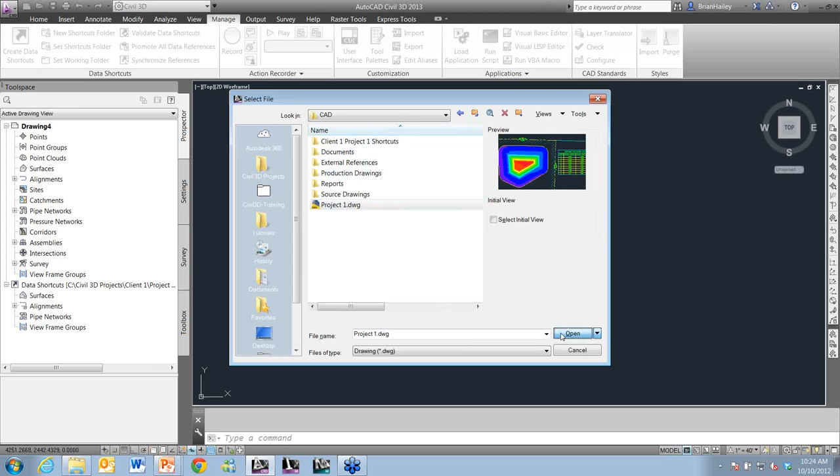Now that I've created this, let me go ahead and actually share some data. So let me open up a drawing here. I'm going to go open up a drawing for Project 1. So Client 1, Project 1, Civil, CAD, and there's my drawing here for Project number 1. So this is my Project 1 source file. This has all the data in it. So I need to open up the drawing that has the data in it.

Right, so here I've got a lot of fun stuff in here, and I want to share some of this stuff with the rest of the project. This surface, for example - if I select this surface, you can see the name of this surface is Final. And I want to share this because I'm going to do some plan and profiles in another drawing, some pond calculations in another drawing, whatever the case is. And so I'm in this drawing here.

Right-click on Data Shortcuts and choose Create Data Shortcuts. This will create the data shortcut. Now, as soon as I do this here, I'm going to be greeted with a nice little nastygram. Basically this is saying, hey, in order to create the data shortcut, you have to save immediately before you run this command. So if I come in here, I need to save the drawing, and I save the drawing, and then just out of habit, after the drawing's saved, I come in here and I accidentally pan.

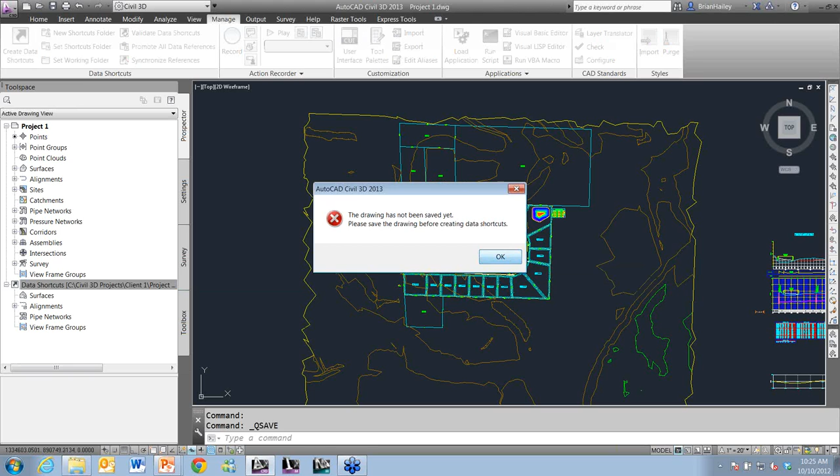Right? Come over here and I say Create Data Shortcuts. I'm going to be greeted with the same message - the save has to be immediately before the command. Now, I have seen issues with this before. Some companies have a LISP routine that runs after a save. If that happens, you're going to have a hard time creating your data shortcuts.

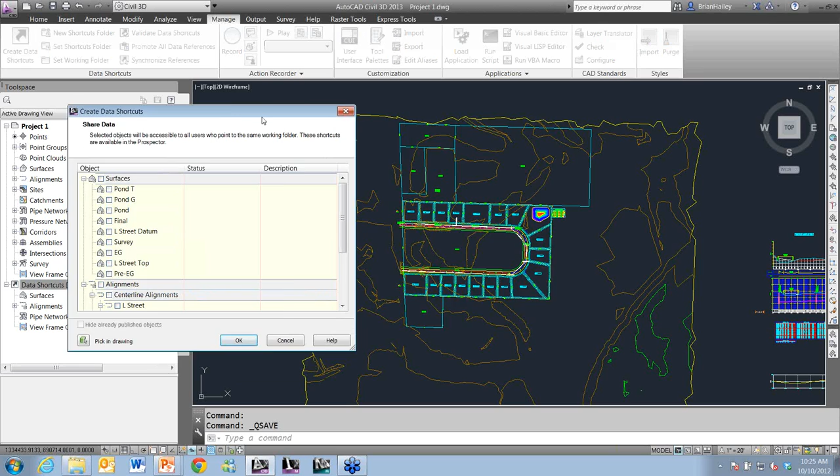So now when I come in here and I create my data shortcuts, I'm greeted with this nice dialog box. This is basically asking me, what data do you want to share? Well, really the only data I want to share right now is my final surface, so I choose my final surface.

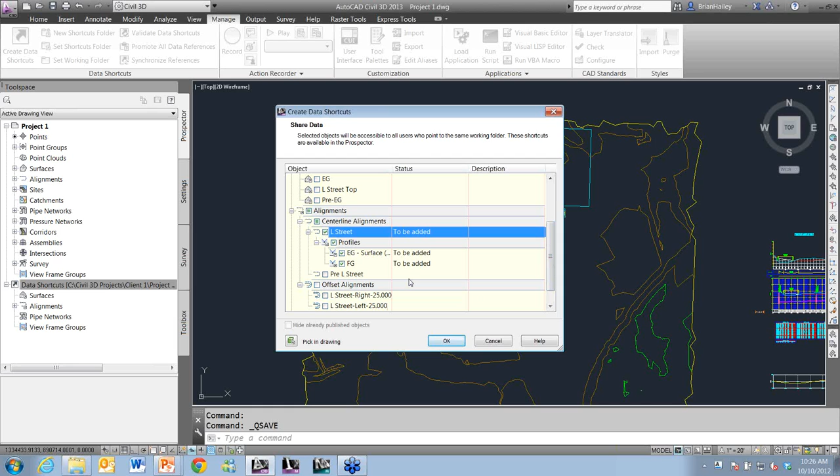And maybe I want to do my L street as well. So this is the data I want to share with the rest of the project. I select OK. And now underneath my data shortcuts, you'll see I can expand these out, and I can see all that data over here under my shortcuts.

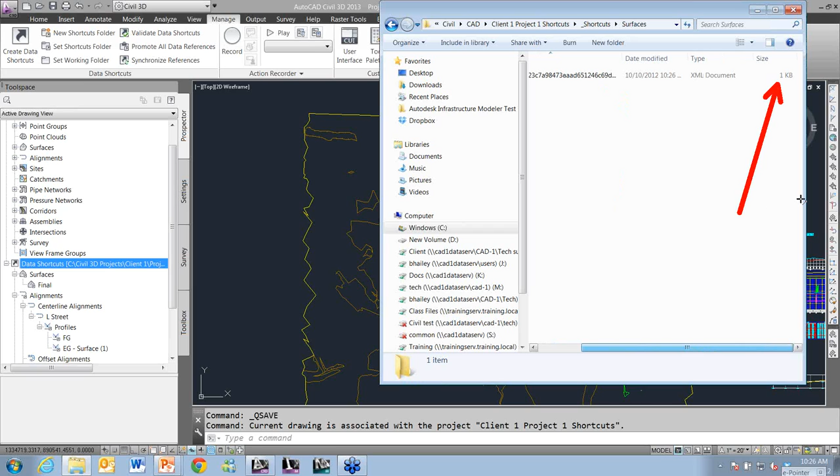Now let's talk a little bit about this shortcut thing. What is this shortcut? Well, let's take a look at it. If you come over here to my shortcuts folder, I go to surfaces, this is the shortcut. It's a little XML file, right? And if I scroll over here, you can see it's an extremely small XML file. This is not the data, this is a shortcut to the data.

All right, if I double-click on this and I open it, oh, it opened up on my other monitor. You can see that's all it is. It's saying, hey, go look here for this surface. It's named this, it has a handle of this. Here's some properties of it.

And that's all it is. It's a shortcut. You can kind of think of a data shortcut like a shortcut on your desktop. Right? Is that Civil 3D? Well, no, it's not. That is a shortcut that runs Civil 3D. This says, go launch this program.

If I right-click on here and I go to the properties of this shortcut, you'll see it says, hey, go run this file. That's basically all it says. If I have Civil 3D up and running, and I come in here and I erase my shortcut off my desktop, what happens to Civil 3D? Well, nothing, it still continues to be there. It's just going to be harder to launch Civil 3D the next time I need to launch it.

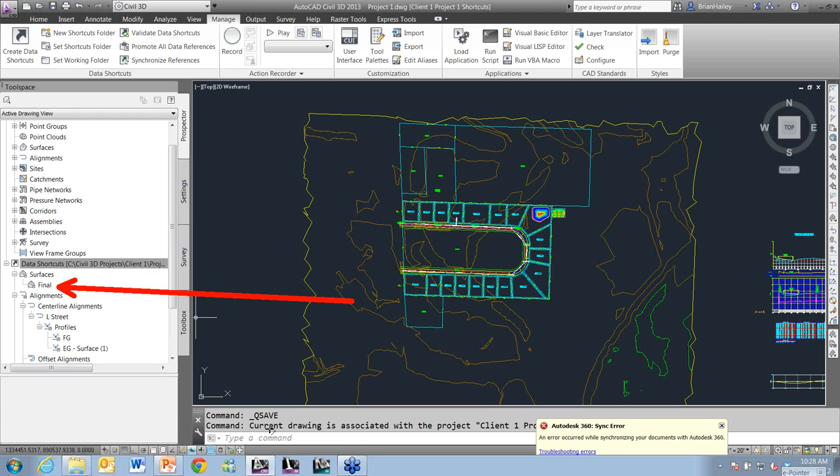You can think about the same type of thing as your shortcut. All right, once I create a data reference using the shortcut, do I need to keep the shortcut? Well, no, it's just going to make it a little bit harder to create that reference later. Now, the analogy does break down a little bit, and I'll talk about that here in just a bit.

But now I've got this shortcut, let me go ahead and create the reference. So I'm done with this drawing, so I'm going to go ahead and close this drawing here. And let me just go ahead and close everything. I'm going to create a brand new blank drawing.

And I want to reference that surface into this drawing. So I come over here to my surfaces. I right-click on the data shortcut, and I get really bummed out because create reference is grayed out. I can't create a reference. Why can't I reference this?

Well, this drawing has never been saved. Right now, this drawing just exists in RAM, it's in memory. In order to create the reference, I actually have to save this drawing. So I'm going to save this drawing. I'm going to call this one surface shortcut or surface reference.

So now that the drawing is saved, it doesn't have to be immediately saved. I can come in here and erase and pan and do all sorts of other things. It just needs to be a saved drawing. So now I can right-click on here and create the reference. Brings up the dialog box.

Basically what it's doing is it's creating a surface in this drawing. This surface exists in this drawing. The only difference between this surface that I'm creating now and any other surface is all of the data for this surface comes from the drawing that contains the original reference. So I select OK here, zoom extents, and here is that surface.

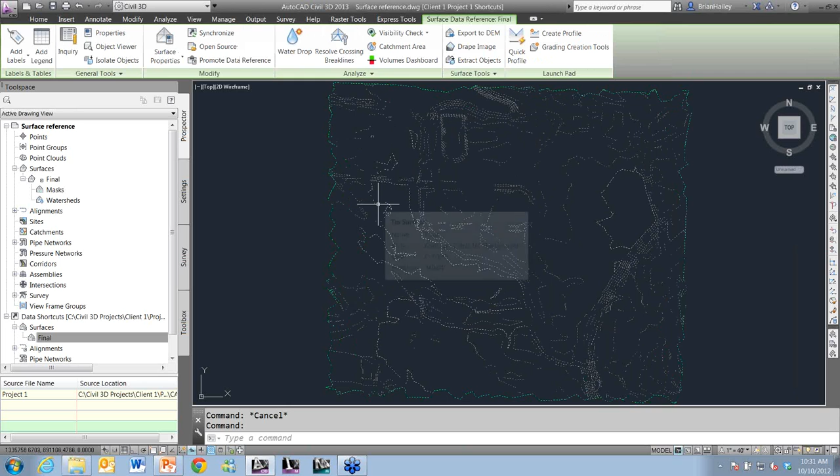So let me leave this drawing open. I need to go make some edits to this surface. I simply grab the surface and need to make the changes in the original drawing. Up there on the ribbon, I can open the source drawing. So I go open the source drawing. Here is the original drawing as soon as it gets done opening.

Now, for whatever reason, it always seems to switch me back to the drawing I was in. So I'm just going to switch back over here. And I want to make some changes. Let's see.

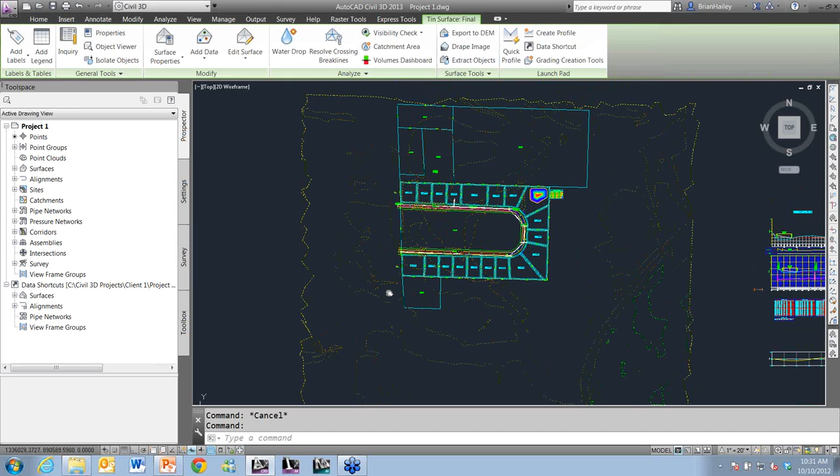What kind of data do we have in here? We've got a couple of pastes. I don't want to have this L Street pasted in here anymore, so I'm going to uncheck that and rebuild this. What you'll notice is in the area of the street, I'll no longer see the contours representing the street. I'll go ahead and close and save this drawing.

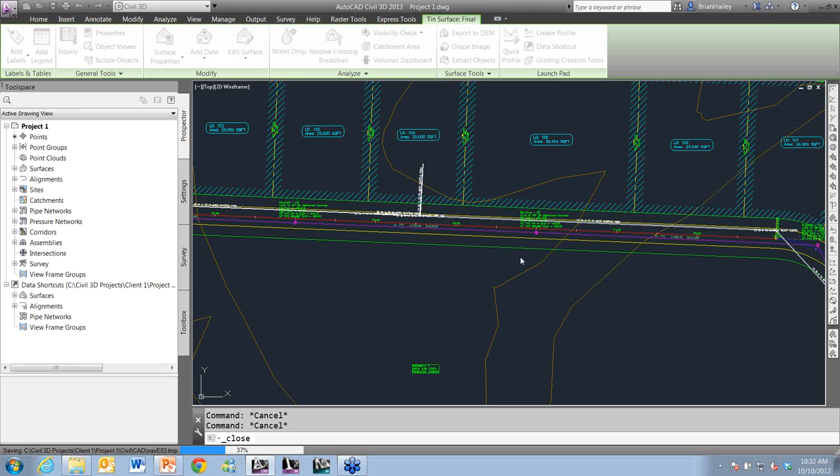So I made a change to the surface, and you'll see the change here a little bit more in a bit. This is what I was referring to - I got rid of the street from the surface.

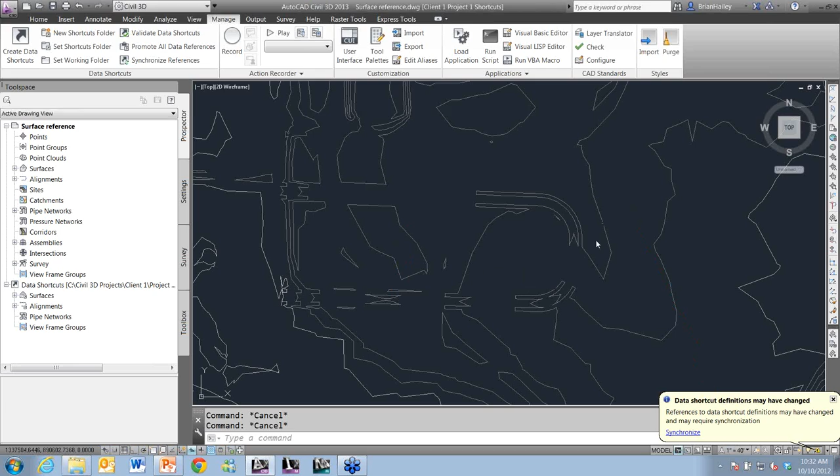Now, as I'm working in this drawing, you'll notice a little bubble pop up saying, hey, your data has changed, let's go ahead and synchronize the data. So I synchronize the data, and you'll see my contours change. This surface is now up to date with the original drawing, and that's all that this little message is saying - it's synchronized. Cool, thanks.

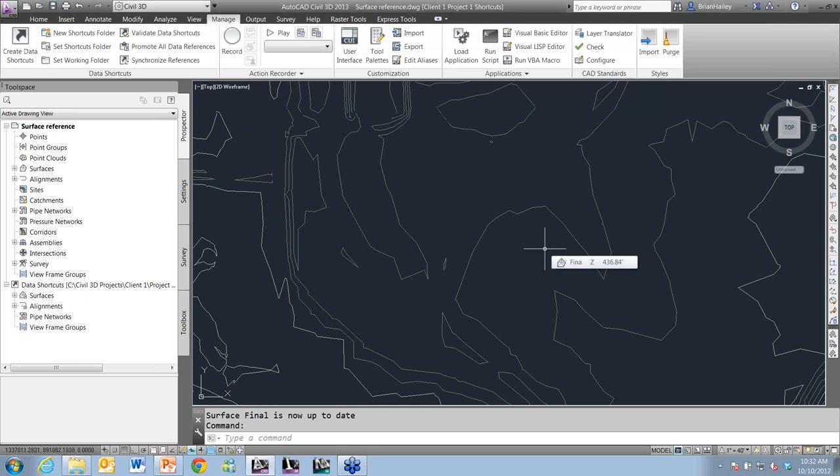And so that's how data references work. Now, remember the analogy I was talking about with the desktop shortcut - if you erase it, you don't need that shortcut after the application's been launched. If I were to come in here and erase this shortcut, I can do that, there's nothing wrong with that. However, if I keep the shortcuts here, Civil 3D will continue to use those. So let me show you the example here.

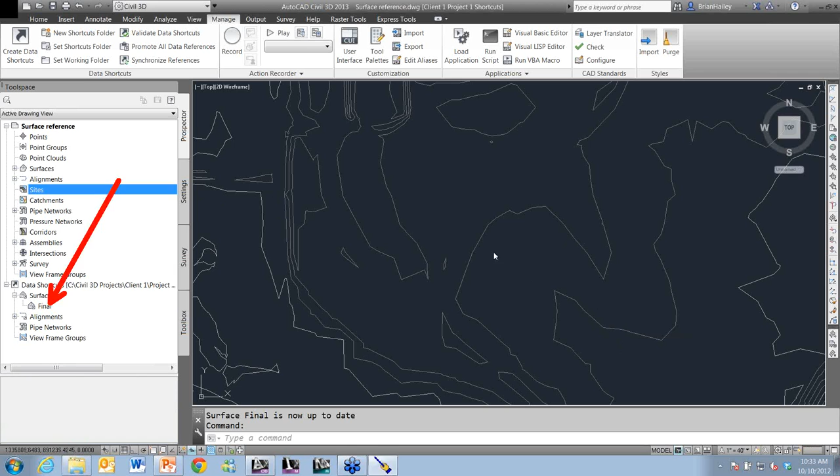I'm going to go ahead and close this drawing. Here I have this wonderful surface. Go ahead and close it, save it. And I'm going to switch back over to my Windows Explorer and rename that drawing.

So here is that Project 1 drawing. For whatever reason, we decided this should probably be in a different location or should be named differently or something along those lines. So I'm going to move this drawing into the source drawing folder.

Now back over here in Civil 3D, if I go open up that drawing that referenced that surface, you'll notice no surface. Why? Well, it couldn't find the source file. And if I expand out surfaces, you'll see I get a little warning symbol next to it saying, hey, I can't find this surface.

And if I expand out, well, the shortcuts look just fine. Now, there is something cool here - if you right-click on here, you can validate the shortcuts. And if you validate the shortcuts, it'll tell you which ones are no longer valid. So you can see these are all invalid shortcuts.

Now I might have 30 or 40 different drawings that reference that surface. If you just have one, it's not that big a deal. You can always right-click on here and repair the broken references, and you can fix it. There's nothing wrong with that, it just seems to be a lot of work if you have a lot of things that you need to fix. And this is something a lot of people don't know about.

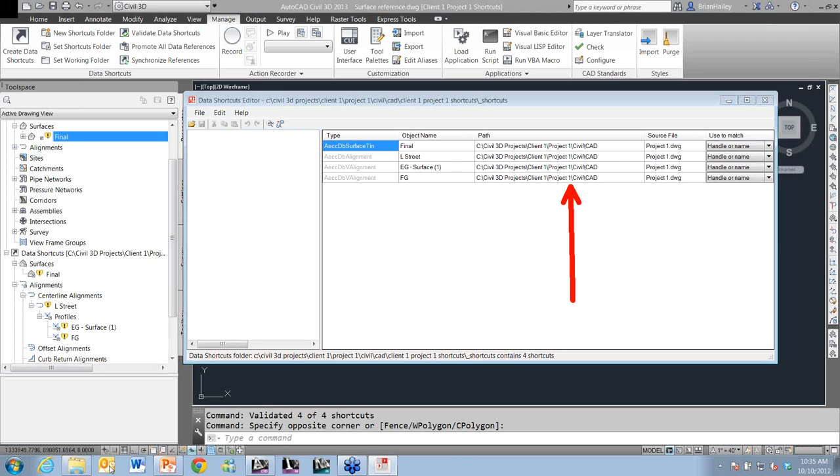Well, I want them to reference the right location, so I'm going to go find that location. So I put it here in the source drawing. I'm just going to copy this path, and I want to replace this path with the newest one. So I'll come out here and I'll edit and do a find and replace - I want to find this path and replace it with this path, I'll paste that in.

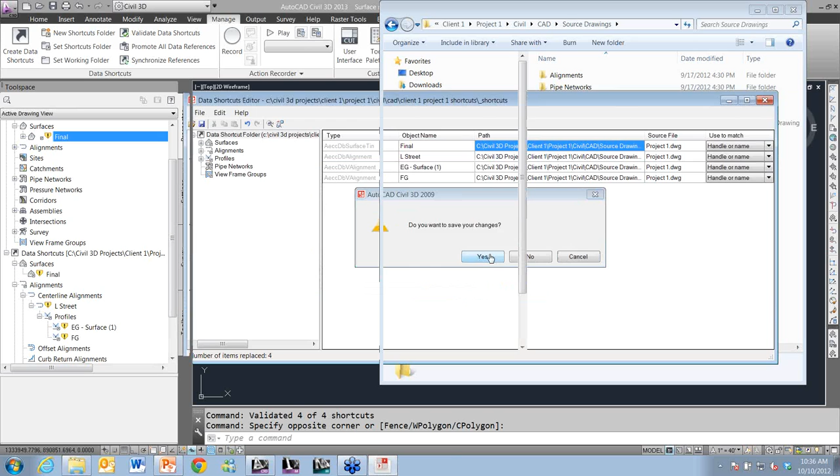I'll replace them all so they have the new path. I'll close this and save it, then close out of this drawing. Now I'll go back and open up that drawing again. I didn't make any changes in Civil 3D, I just did all those changes back there in the shortcut editor.

So why didn't it work? Let's double check something here. Let's try this: Validate. All right, shortcuts look good now, they're all valid. Let me go ahead and reopen this drawing again.

And there it is. So you can make this change for a large number of files here using the shortcut editor, which is a really cool thing.

This also works if you decide, hey, I want to reference a different surface. If for whatever reason I erase that surface and create a new one, you can tell it to reference a different surface as well if you want to.

So that's the way shortcuts and references work. If anybody has any questions on that, please type them in there. I'm going to go ahead and move on.

I'm going to move on to project management, the managing and organizing of files. When we're in Civil 3D, this is really, really important to have a good understanding of how you should organize your files.

You don't want your Civil 3D data... let me rephrase that. When you're creating a file, the only thing you should have in that file is what you need to create it. For example, if I'm working in a road plan and profile drawing for plotting, the only thing I should have in that drawing is what I need to create that road plan and profile drawing. I don't need a bunch of sanitary sewer profile views in that drawing if I'm not going to be plotting those for this particular thing. So you want to limit what you've got.

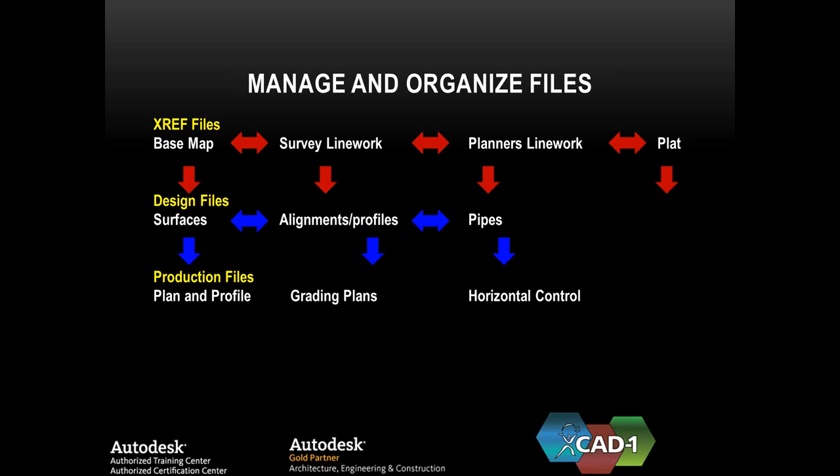If I'm doing a grading plan, do I need to see the pipes? Maybe, maybe not—if you don't, you simply don't data reference them in. My plan and profile stuff, do I need to see all those intermediate surfaces I used to build my model? Maybe, maybe not. You want to get just what you need for those files. So I'll data reference in my design files, but I also need to see stuff from the XREF files, so I will XREF those in as well.

As you're going through and creating this, notice there's nothing going between the production files—the production file is the end thing. You're not doing any modeling or drawing that you want to share in the production file. This is the way I always like to manage my files. If you can get this concept down, your life is going to be a lot easier, your drawings will work faster, and everybody will be working together at the same time.

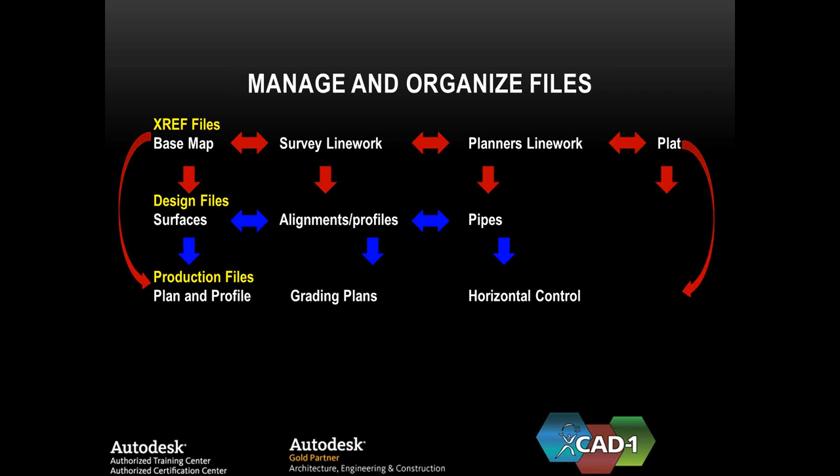So this is managing and organizing files. I'd like to open it up now to any questions if anybody has them—you can put them in the question box. We haven't had any questions yet, so if you have any questions on processes, workflows, anything like that, feel free to ask. We can also unmute you if you'd like to speak with us directly—just throw something in there and ask to be unmuted.

I'm not sure, do we have speakers? We got speakers, yeah. I don't know if they're on or not. They're there but not turned on at the moment. We can turn them on. So if anybody has any questions—no questions. All right, well, finally, there you go.

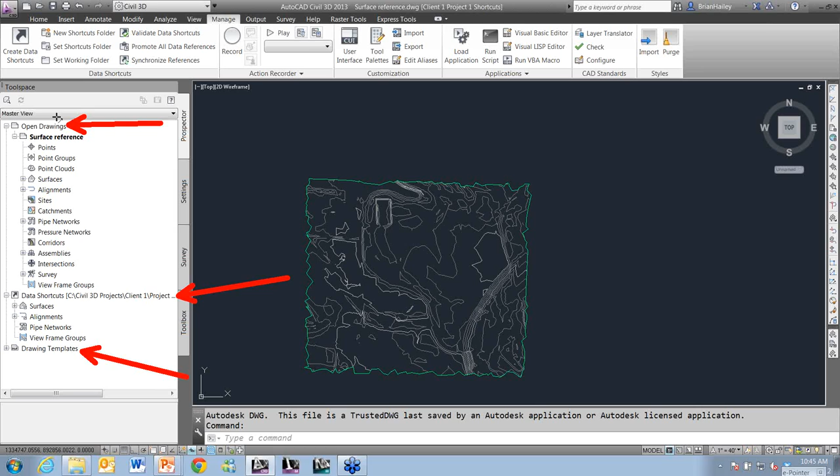I started teaching on the software in 2007, and I know it's been down there since 2007. If you're on an older version and don't see it, make sure you set your drawing view from active drawing view to master view. If you set this to master view, you'll see all your open drawings, your drawing templates, and the data shortcuts. In the last couple of releases, they made the data shortcuts visible just in the active drawing view, so you don't have to set it to master view. If you haven't seen it in the past, that might be why.

Don't feel bad, Alonzo—we train a lot of people, and I know when I started my career I was drawing things in AutoCAD. To this day, if I had to draw something, I'd revert to probably AutoCAD Release 10 methodologies, because I wouldn't know what else was in there. That's one of the things that happens: you learn the software a certain way, and you're always busy, so you don't always have time to discover these new things. It really is a challenge.

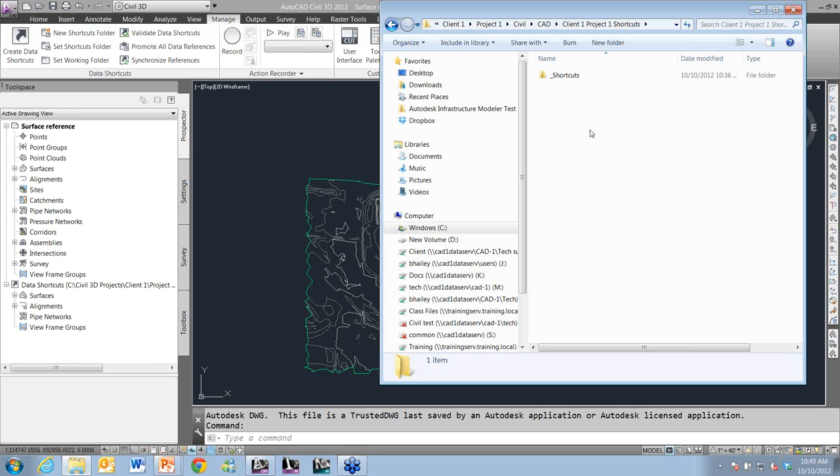They should work. You might have to go through and repair broken references, because when you unzip the e-transmit zip file, you will have the data shortcuts, and if you don't have the same folder setup as where they came from, you might have to do some repairs on those. Let me go ahead and do an e-transmit here real quick. One of the options for an e-transmit, if you'll notice under the Civil 3D dependencies, you'll actually have the shortcut source file, so that source file that I'm data referencing the surface from will be included in the e-transmit.

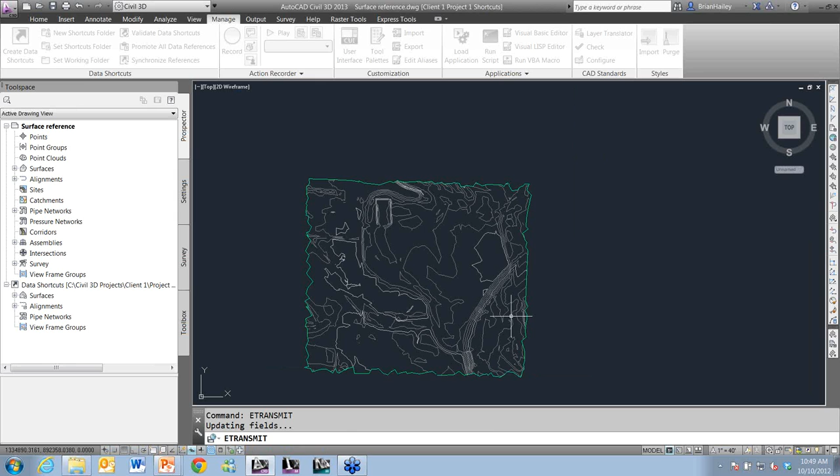Let me see how this is set up. Zip file, it's going to throw it—good, let me go ahead and create this, and I'll open up that zip file. Here's the e-transmit I just created, and you can see I have both the surface as well as the drawing that has the surface, and the one it's referenced into. So all of the drawing files will come along with an e-transmit. Hopefully that answered your question, David. But as for duplicate surfaces, I haven't seen anything along those lines. Okay, that answered David's question.